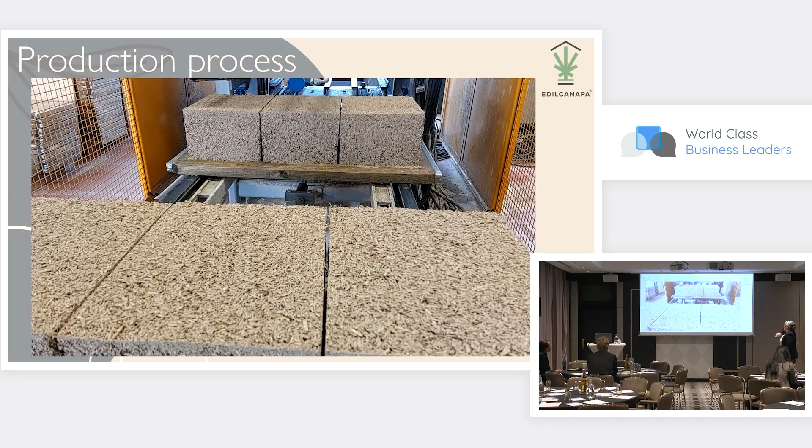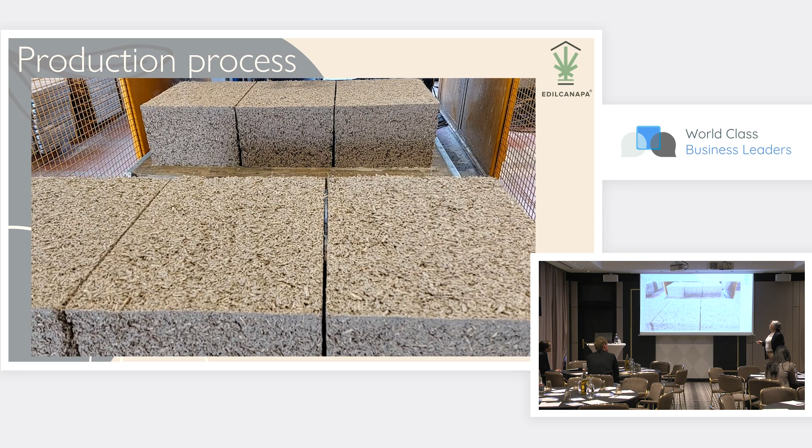This is the brick production. The bricks stay on this wooden panel for 24 hours, and then are put outside to dry, staying there for 28 days.

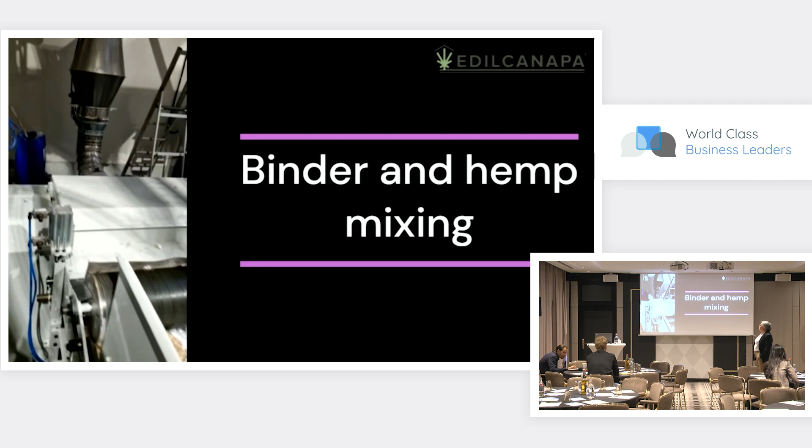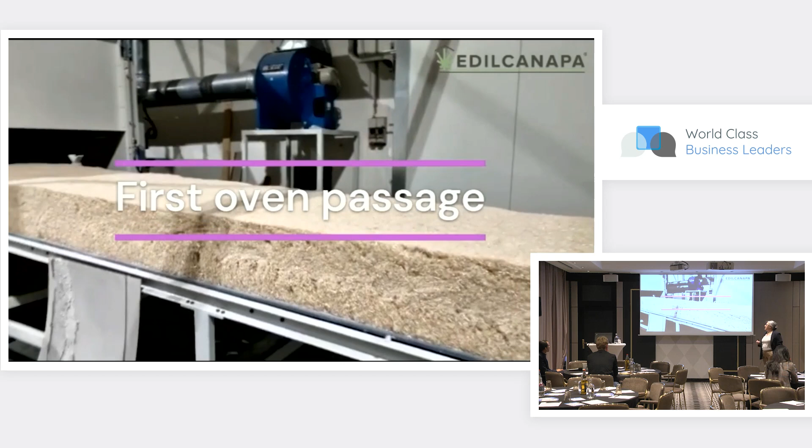This is the pilot plant for the panel. As you can see, the panel is mixed with a bicomponent fiber that is not natural, but can also be mixed with PLA fiber, getting a 100% natural panel. This is the system, and this is the phase to fix the thickness of the panel, and finally, of course, there's the cut.

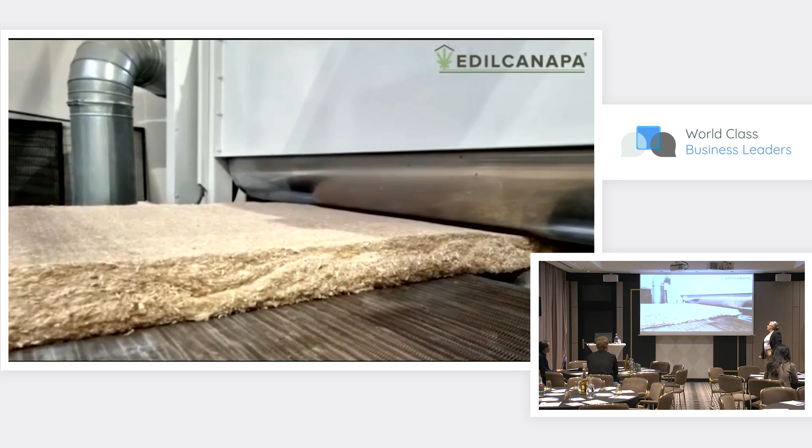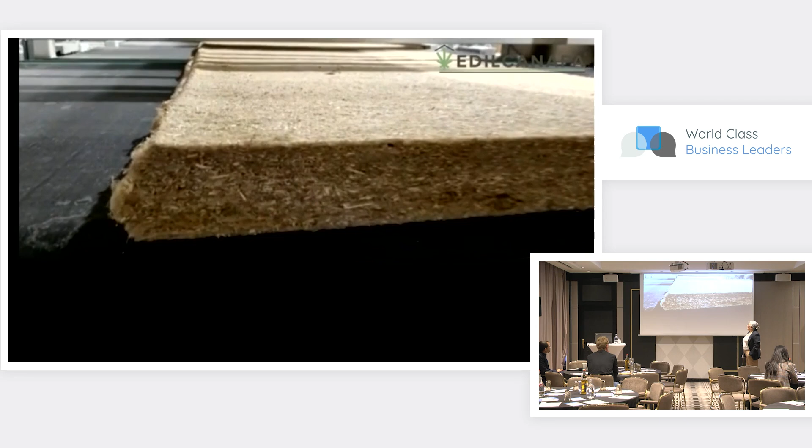We are also studying a system to put at the beginning of this plant so we could take stems coming from the field cultivation, just cutting them and mixing them to make this kind of production. With this plant we can work both with perfect clean fiber, 95%, and dirty fiber, 50% fiber and 50% hemp wood shives.

Another important aspect - I don't want to be too technical, but I'd like you to know that products made of hemp have so many excellent performances at the same time that it's really difficult to find any other products on the market with the same combined performance as hemp and lime, or hemp and binder materials.

Let's look at them quickly. They are perfect thermal insulating materials - with 30 centimeter thickness we already have excellent thermal performance. They are also excellent acoustic insulation materials, and of course they are eco-friendly because part of the components comes from nature, from the hemp plant. They also have thermal inertia.

This is a technical aspect, but very easy to explain. These materials also protect us from high temperature in summer, because they obstacle the entrance of the heat inside our houses, so they reduce in an important way the use of cooling during summer. If you build using this material, you will have excellent performances in winter, a very low use of energy for heating, and also in summer. So these are excellent products to be used in countries like Italy, Greece, Spain, where we have problems with hot summers.

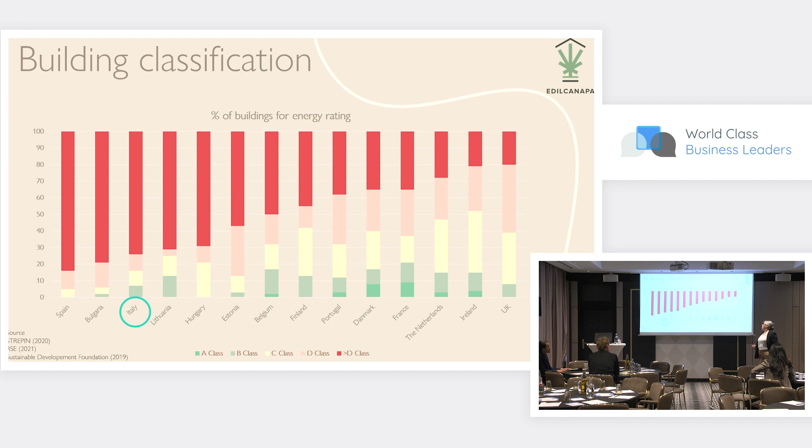And I'm about to close. Just to translate that almost 70% I showed you before: I'm speaking about 12 million residential houses to be requalified, and please know that these 12 million correspond to 39% of energy consumption in Italy. That is to say, almost the greatest consumption of the main energy need in Italy is due to residential use. And Italy imports 80% of its energy needs.

And I would like you to know and remember that to reduce the temperature in a room by 1 degree, you need 3 times more energy than the energy you need to heat the same room. So it is very important to use materials that will protect us from cold temperatures in winter, but also hot temperatures in summer.

And my conclusions: of course, we were speaking with our speakers before, and it is not easy to promote, to present our products on the market. This is still a niche. There is space for companies, not only my company, but also competitors working in the same field. We are increasing our business, but it's still not enough, considering all the investments we made and the efforts we are trying to do to promote the use of these materials.